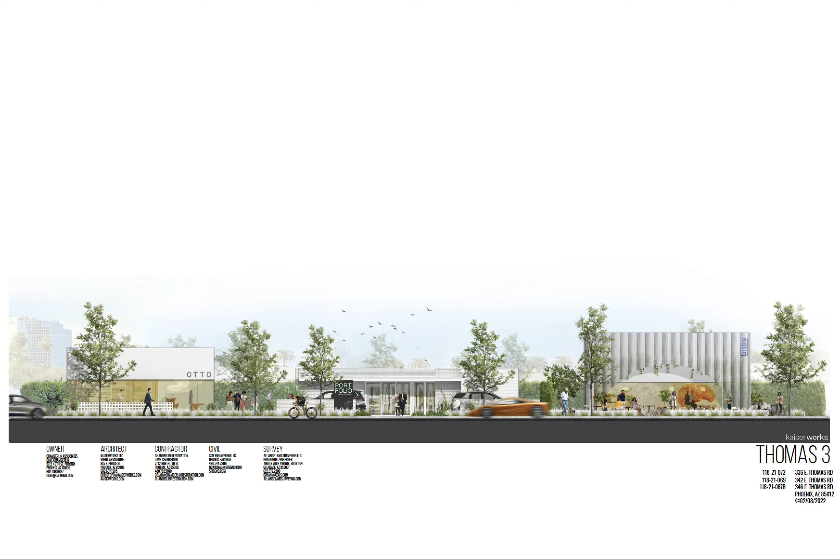And then I'll zoom into this in some further slides where we can see that a little bit more crisply. In this next site plan, we're looking at the 5-foot wide planter, again with the 6-foot wide sidewalk directly north of that.

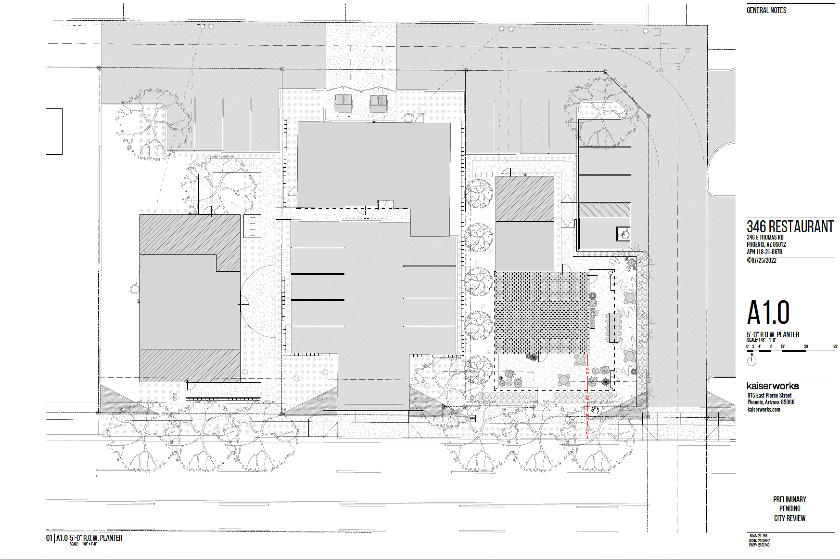And moving a little bit further west, this is 336. Similarly, we were staying true to the existing sidewalk that was directly on Thomas, and had a substantial amount of landscape between that sidewalk and our glazing wall for our office space.

And since that initial meeting, we've had a pre-app, and we've been working to make adjustments per concerns and considerations being offered to us from the City of Phoenix, which brings us to where we are today, with the topic being the right-of-way and what is the depth.

So in this plan iteration, we're showing a 10-foot depth for the right-of-way planter area, a 6-foot wide sidewalk, 5'8" of planter space, and then a 7'2" outdoor patio space. So this outdoor patio space is sort of the casualty of accommodating a full 10-foot wide right-of-way easement.

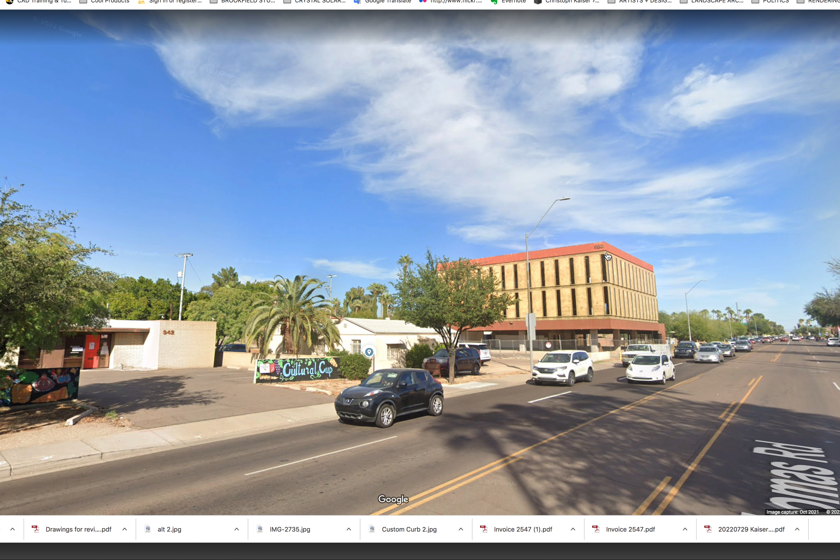Before I go to the next slide, I want to zoom back here and just talk about 500 East Thomas. Specifically, the right-of-way dedication that was done just last year for this building is 7 foot in width, and that basically takes us to the front face of the building. So even if we were to achieve 10 feet of right-of-way planter along Thomas here, that would not be possible. I would say that would never be possible given the location of where this building is currently.

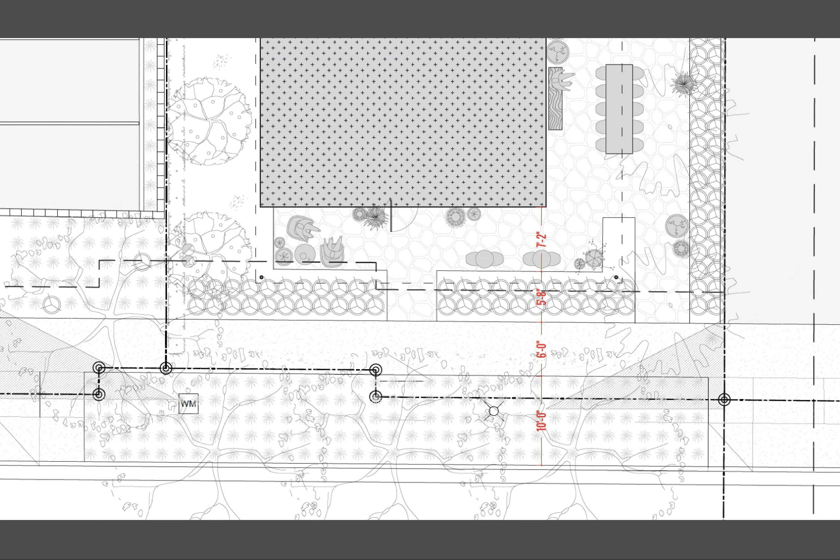So there's going to be a jog. If we were to go 10 feet here, it would jog back out towards Thomas in front of 500 East Thomas. So for, I would say, consistency's sake, we would also argue from that standpoint that we would prefer to have a smaller planter than the full 10 feet, but it really boils down to the usability of this site and the fact that this is an adaptive reuse project.

That's something that I think we'd be looking at this through a different lens if these were new builds, but the fact that we're working with existing bones is a significant, I don't want to call it hardship, but it's a factor that we're working with, one of many criteria that we have to deal with this site. And so I think our request for a 5-foot planter versus the 10-foot planter should be viewed within that lens.

So again here, 5 feet, 6 feet, 6'2". And this 6'2" planting really is just so there's a practical landscape buffer between someone just walking down the public sidewalk and someone enjoying coffee and a croissant in this covered patio space.

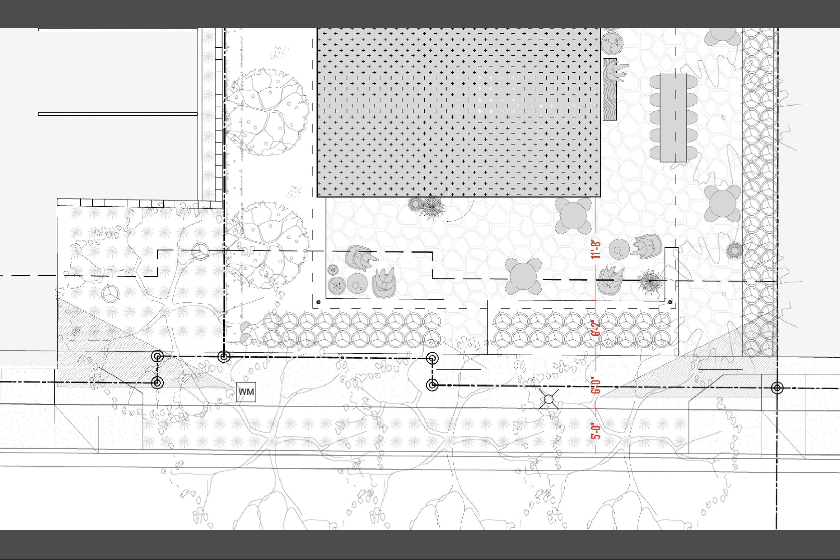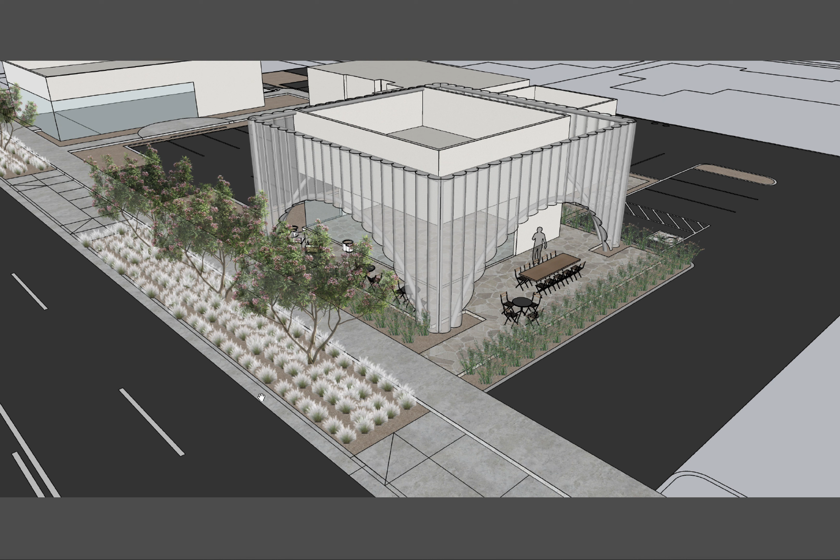So here we have our 10-foot right-of-way, and here's our 5-foot right-of-way. We would argue that this gives a good and generous amount of planting. It enables us to plant our trees for shading the sidewalk adequately, and it allows us to have a nice landscape buffer that precedes, I would say, a workable front patio space. Alternatively, we're losing just under half of our usable patio space, which for a sort of bespoke boutique scale restaurant is significant. That's a hardship that would equate to real dollars for a restaurant of this size.

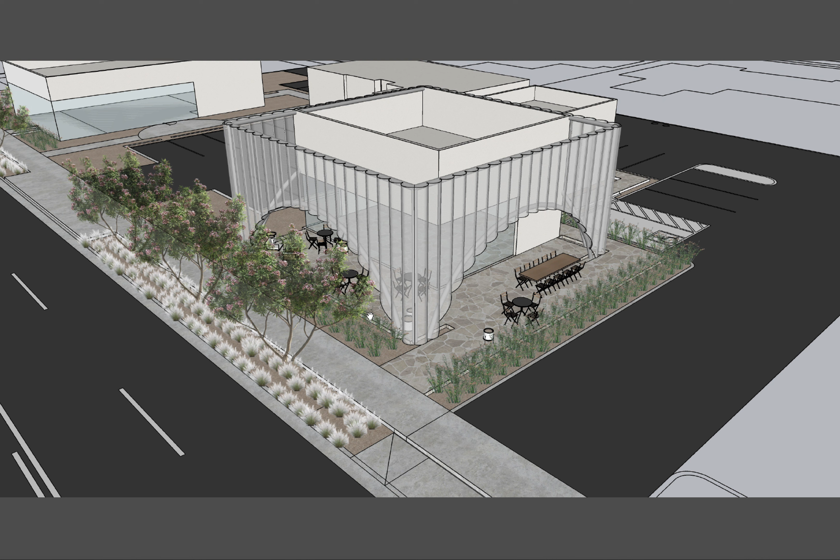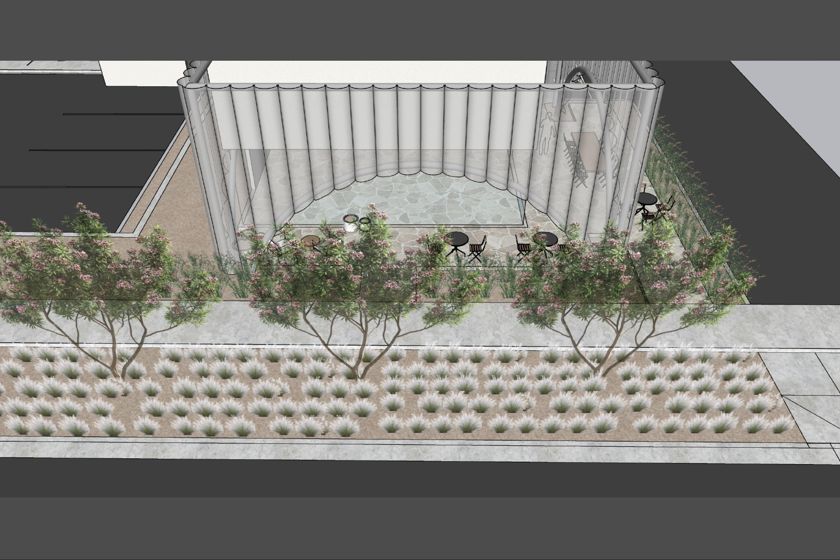Moving now to our next slide here, we are facing due north. We're elevated again. We're looking down. Here we have 10 feet, and here we have our 5 feet right-of-way planter. And just take note of the patio space and the difference between those two patio spaces. One feels more like something you're simply walking through. When you have an entry doorway and people walking to that entry doorway, it really becomes more of a thoroughfare than it does a place to hang out.

This image may be one of the more telling ones. Again, here we're showing this is with the 10 feet right-of-way planting area out on Thomas Road, and we're dealing now with a 7-foot 2-inch space between the glass and the back of structure. And then here is with the wider, we have, I would say, a workable amount of space to turn this into something where people would want to hang out.

And I should say also, you'll have to forgive the SimCity sort of cold, robotic nature of these renderings. These are quick renderings. What you're not seeing here, this is a vine-clad ceiling plane. So we have vines just sort of falling from the ceiling throughout the space, growing up through this structure as well.

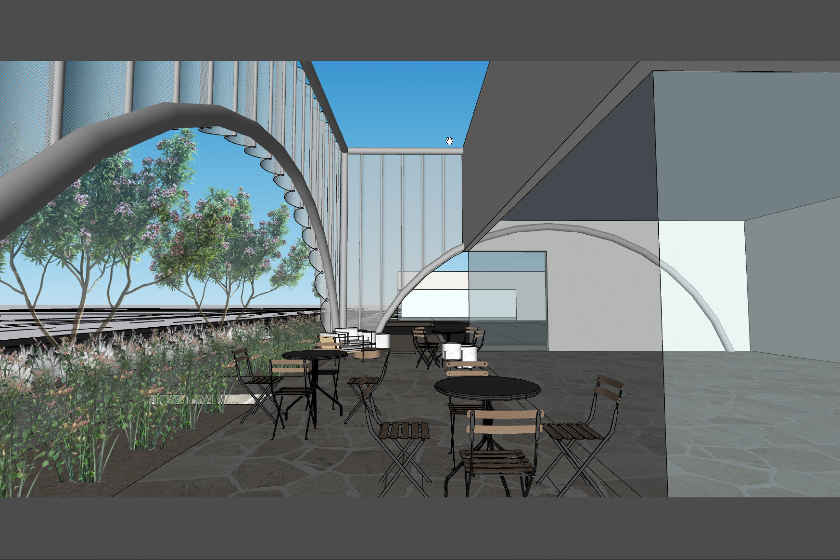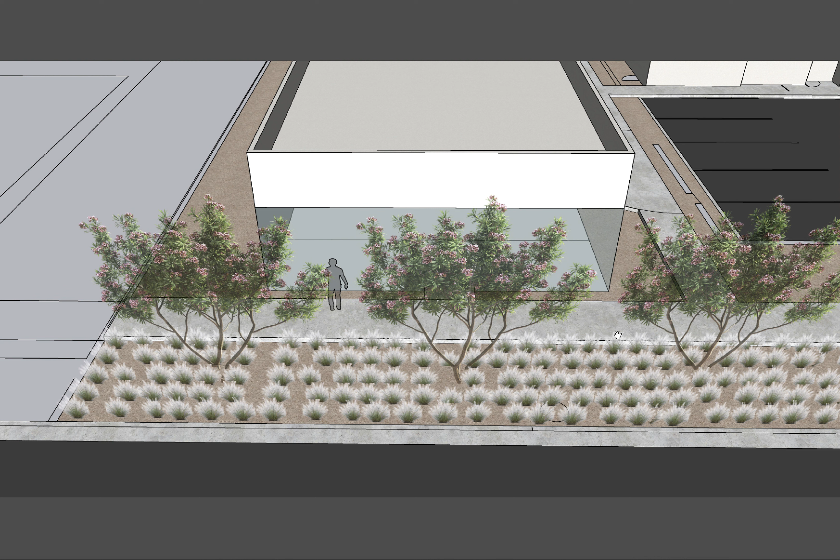We could put a row of plants in there, but it's not a lot when you can simply reach from the sidewalk over to your glass of the storefront, and directly beyond that we have a lobby and a conference room, versus if this is going to 5 feet, we can still get our shade trees located there, and we have what I think is a more reasonable breadth of landscape for separation between those activities. So we look forward to your thoughts on this.